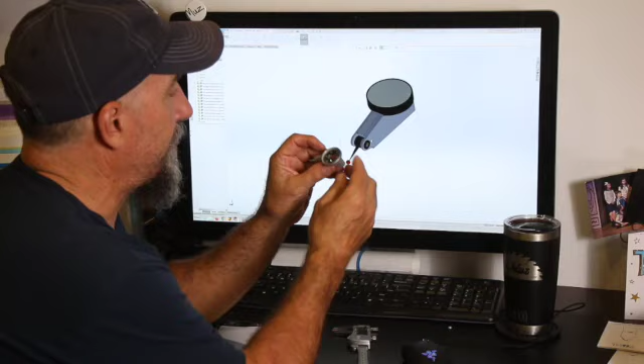So I just finished modeling this dial indicator. So what I plan on doing here is I'm going to make a wall clock.

And this is not my idea. This is Joe Pieczynski, who's a machinist and a YouTuber, great channel, one of my favorites, I'll put a link down below. He made one on his channel, and I liked it. And I got a hold of him. I said, Joe, do you mind if I make the same clock for my shop teacher who's retiring? And he said, no problem, but I have no plans though. I said, that's okay, I'll figure it out.

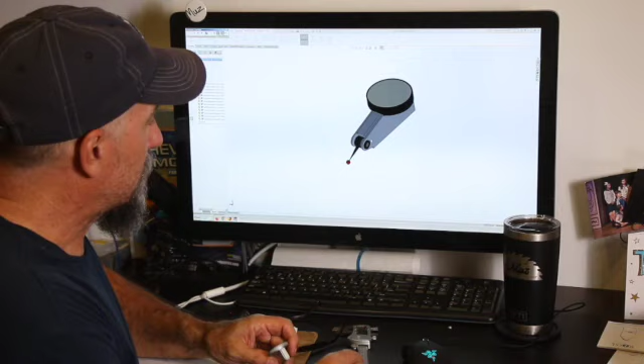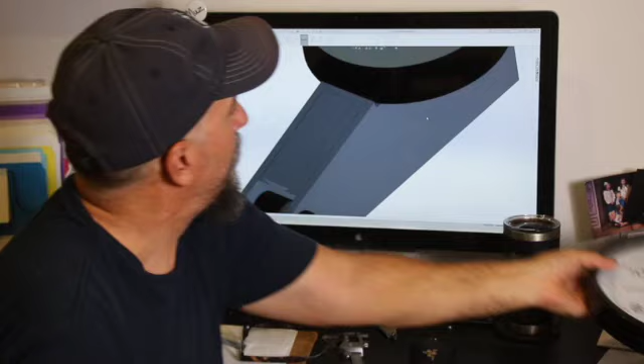So what I did was I took the measurements off this dial indicator here, put it on the program, and then after I had all the parts, I scaled it up 10 times. So it's gonna actually be like 23, 24 inches, because here's a clock for it. So imagine that. So, yeah, it's gonna turn out cool. It should work, it works here on the program. So I got all the dimensions written down, I got the clock, I got the MDF. Yeah, so let's get started. Let's go over there, get in the garage, and let's do this.

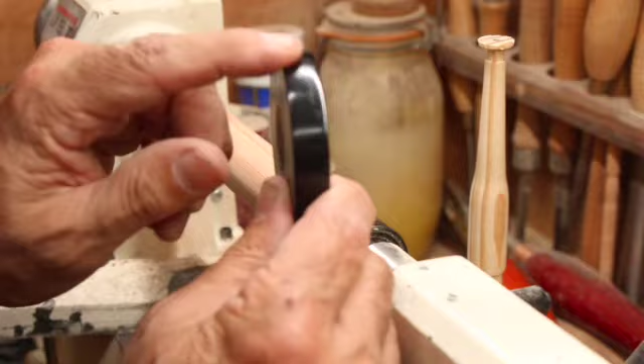So what I want to do here is these are all going to be painted, but I don't want them to look like painted wood. So especially like the arm here and the pin that's running through, and the ball. So what I did last night, I did an experiment, and what I did was I used some CA glue, and I did a couple coats of CA glue, sanded it down, and then painted it. And this is only like 2 coats of CA glue and 1 coat of paint, and it really turned out, and I'm not sure if you can see that, but it's super smooth. And I think if I took my time, it's going to really look like painted metal.

Let's do it. Starbond. About 4 coats and some quick sanding in between, and it's got this plastic feeling over it. So the paint should cover that really nice.

Okay, the next thing I need to do is drill a hole straight through the center of this ball. And I learned a little trick on how to do this, kind of cool actually. So what you do, you get a sacrificial piece of wood, and you get a Forstner bit that's just a little bit smaller than the ball itself. And you drill a hole almost all the way through this, and it's going to create a little bed. And without moving anything, you switch out the bits to get the drill bit to the sizes you need, set this in the bed, and it should go right through the dead center of that ball.

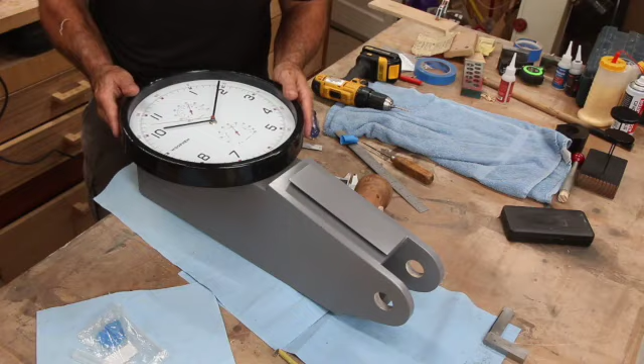Alright, so we've got all the arm assemblies pre-drilled and ready to put together.

Putting on the final touch.